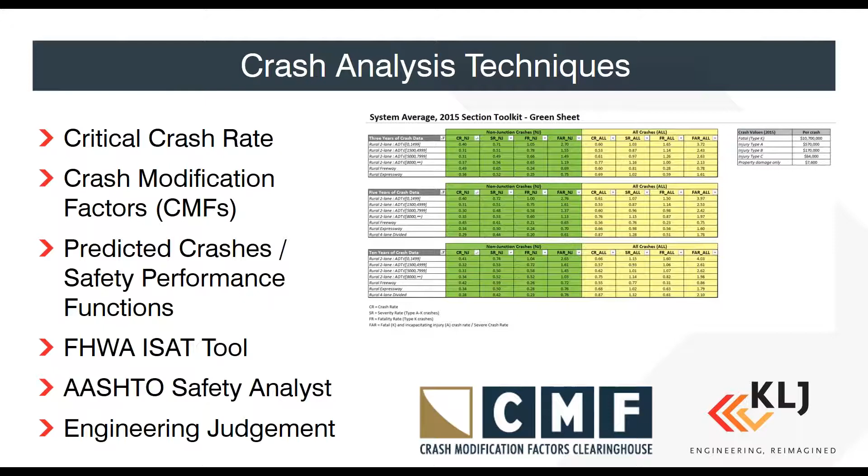But when we really look at the basis of all of these future crash analysis techniques, CMF data is really at the basis of all of those. And what happens with the CMF data is, because it's based on a number of different studies, some of these improvements have quite a big range of what that expected safety benefit is. So two examples I pulled out.

One was a DDI interchange, converting an at-grade or diamond interchange to a DDI. I pulled all of the crash types and crash severities that lined up where they were all the same, and even filtering out some of those crash rates, we still have a range of about 0.54 to 0.81 CMF factor. That's over a 30% difference in those expected safety benefits for that type of interchange.

J-turns or reduced conflict intersections show an even greater range of safety benefit when you start looking at the applications, between 60% all the way down to only a 13% improvement, which makes a big difference when you have some of those higher injury type crashes, and really can skew your final preferred alternatives one way or another based on which CMF factor you're choosing.

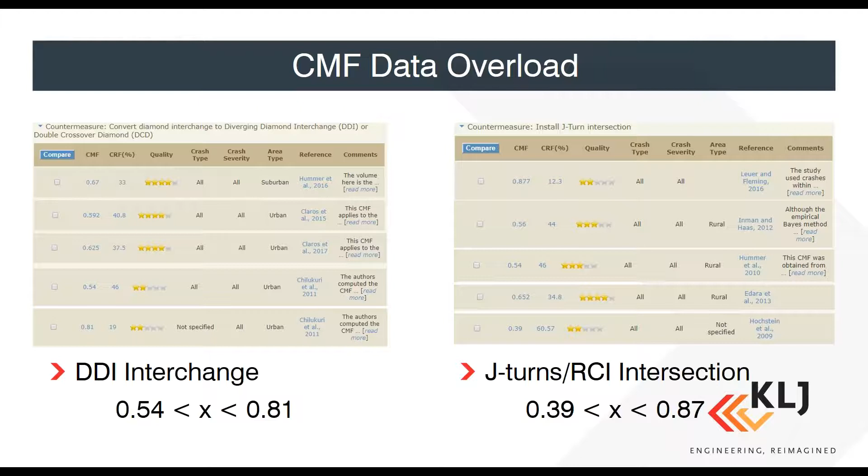So this was what really prompted me to look for other tools that are out there. One of those tools was the IHSDM, the Interactive Highway Safety Design Manual, or model, which has more of a design focus.

It has different inputs such as the horizontal alignment, vertical alignment, lane offsets, shoulder sections, design speed, and driveway density. When you start really looking into these details, there's a lot of spots where if you don't have that level of detail, you're really still guessing, and there's a lot of variability in those values and what your final answer might be coming out of a safety analysis like this.

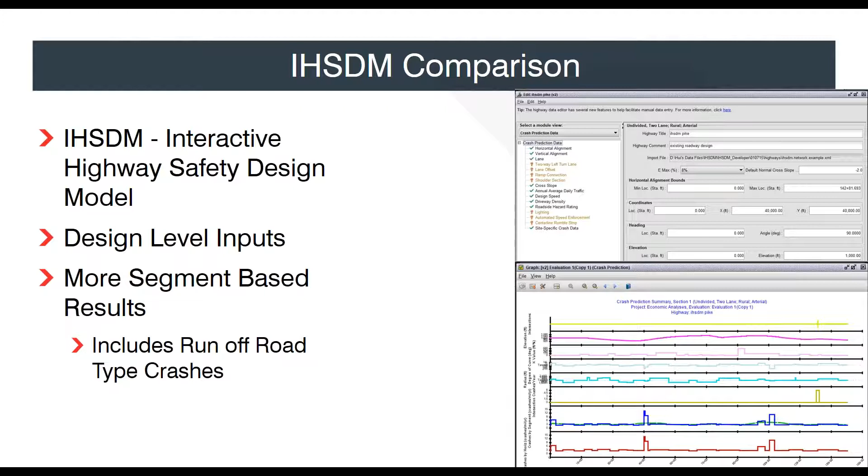So this is really more of a segment-based software that's looking at those final design type safety benefits. It does a very good job of including runoff road type crashes and really looks at all the different crash types you could look at. But there still are some holes when we're really looking at that preliminary stage, looking at 3 or 4 alternatives and trying to pick which one's best for us as traffic engineers.

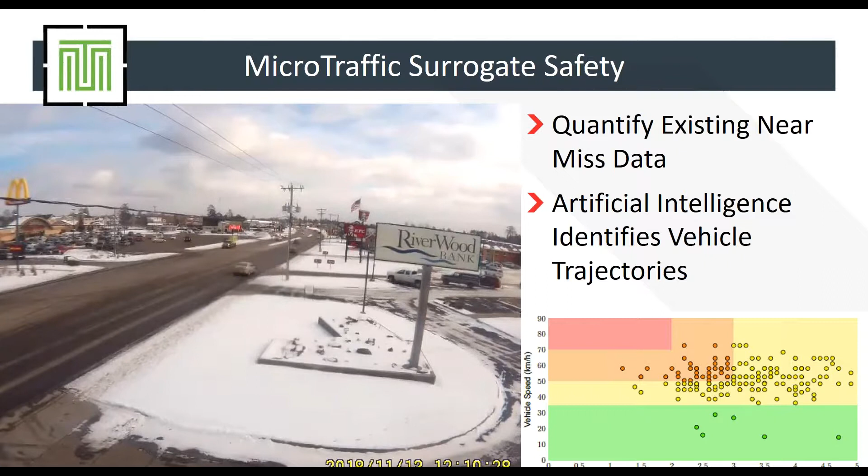So getting into the SSAM modeling approach, this is an example from Bemidji, Minnesota, where we used a company called MicroTraffic to really start looking at the existing safety and existing conflicts on one of our study corridors. What we did with this data is try to quantify the existing near miss data that's happening on these roadways. As you'll see in these 3 or 4 examples, these vehicles are only having about a 1 to 2 second gap where they're getting across traffic before another vehicle intersects that trajectory.

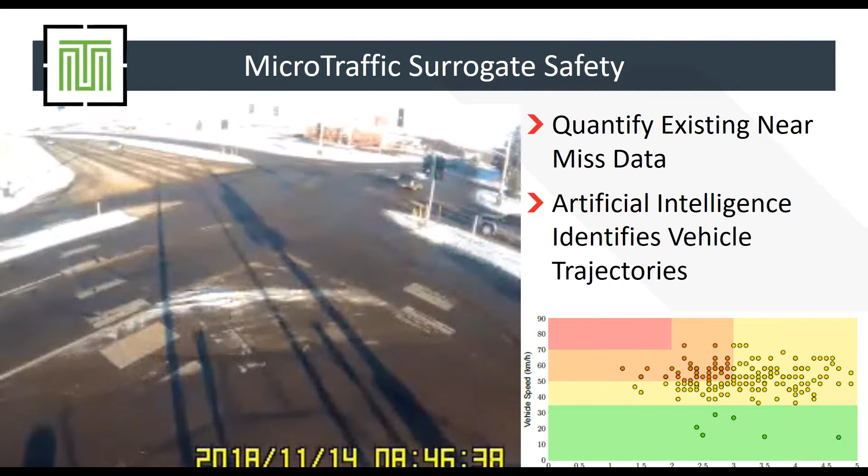By quantifying these near miss type conflicts, we can start looking at what truly is the existing conflict potential of that intersection. In this example, that kind of permissive movement and crossing movement is the most dangerous, when a vehicle makes a mistake, a second or two earlier or later could cause a pretty serious crash. So these are the exact type of conflicts that we're trying to minimize through our design of improvements, to try and improve the safety of both the intersection and the corridor as a whole.

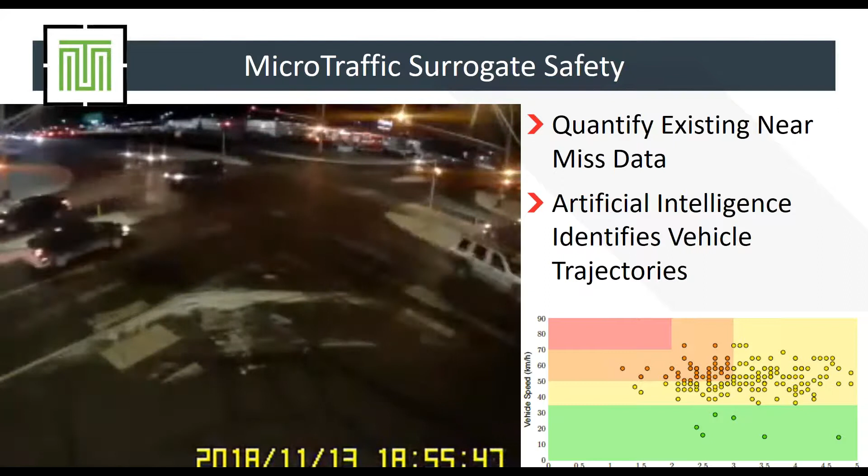Getting into the surrogate safety assessment model basics, the conflicts are broken up into three types: crossing conflicts, lane change conflicts, and rear end conflicts. Crossing conflicts are basically anything between a right angle to a head-on type conflict in the trajectory file. A lane change is when vehicles are shifting lanes at about 30 degrees from that right angle. And a rear end type conflict is when one vehicle is coming up behind another vehicle, and if they didn't make that braking decision in time, they'd end up rear-ending the vehicle in front of them.

SSAM also does a good job of allowing you to calibrate time to collision and post-encroachment time. Time to collision is that front gap ahead of a possible collision, and we are looking at everything from 0 seconds to 1.5 seconds out of VISSIM. That maximum post-encroachment time is more for rear-end type conflicts, where we've actually taken that down from the default of 5 seconds all the way down to about 1 or 2 seconds to better validate from our existing data in our models.

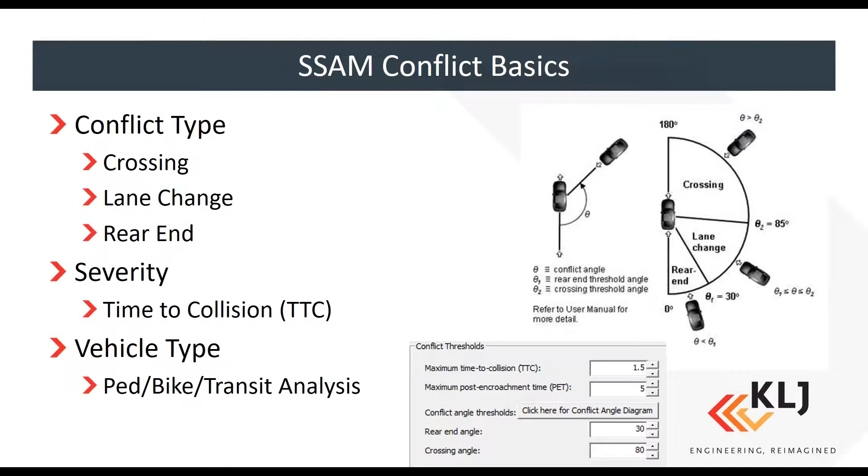The SSAM analysis really starts out with how you're coding your Vissim models. Vissim is by far the best tool to use with SSAM because it's literally checking one box in your evaluation configuration to output this trajectory file of the vehicles. It's very important to have your sensitivity at 0.1 seconds so we're getting 10 time steps per second to really look at the interaction between vehicles. It's also important to keep those constant parameters when you're modeling.

Having a guide to go by for priority rules and conflict areas where vehicles are interacting is very important in keeping your models consistent as you compare alternative to alternative and increased volumes in future models. Also doing realistic Vissim calibration, watching your models to make sure you don't have vehicles crossing other vehicles, is very important, as is making sure signal timing is correct.

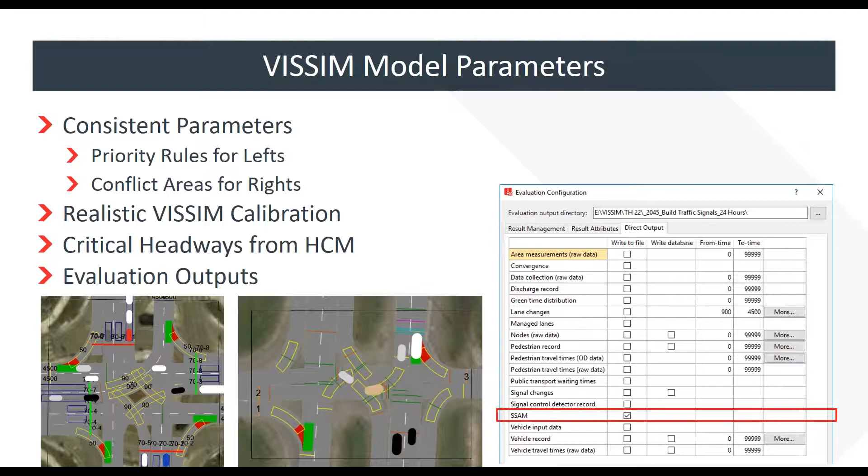All of these lead into issues, if there's a mistake in your Vissim model, you'll have a situation where one spot really pops out as having a safety issue in the SSAM analysis. Also, basing your priority rules on critical headways from HCM is important to really give that variability, with some vehicles having aggressive behavior at unsignalized intersections or permissive movements, and others having a more conservative nature when interacting with other vehicles.

Specifically, a couple of intersections I've pulled out: mini roundabouts and roundabouts. Those are very important to look at for larger vehicles, like WB-62s going through, where you might need an additional priority rule to allow that vehicle to clear out of the intersection before the priority rule allows another vehicle to enter.

If you think of the real life application of a mini roundabout, if there's a large truck in the roundabout, you're probably not going to try to pull into its trailer. You're going to allow it to get through the roundabout, and that's where the priority rule comes in.

So really taking a look at the modeling, looking at those crossing gaps and trying to get them as realistic as possible, is very important.

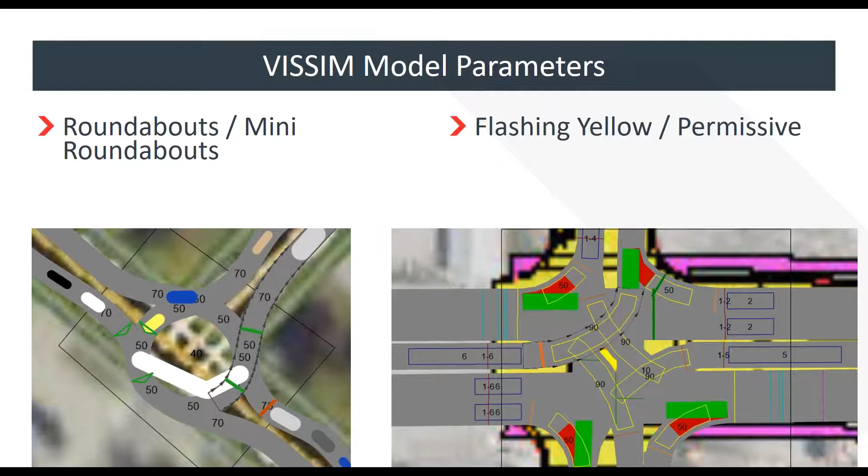Same thing with flashing yellow and permissive movements. We code these with the signal group in the priority rule, so that when that signal group turns yellow, for example in the phase 2 direction, the left turn will actually make that movement on yellow. And if one of the eastbound or westbound through vehicles goes through that yellow light, we'll actually get that crossing conflict. That's what gets quantified at some of our signalized intersections, the conflict we're trying to prevent in these modeling exercises.

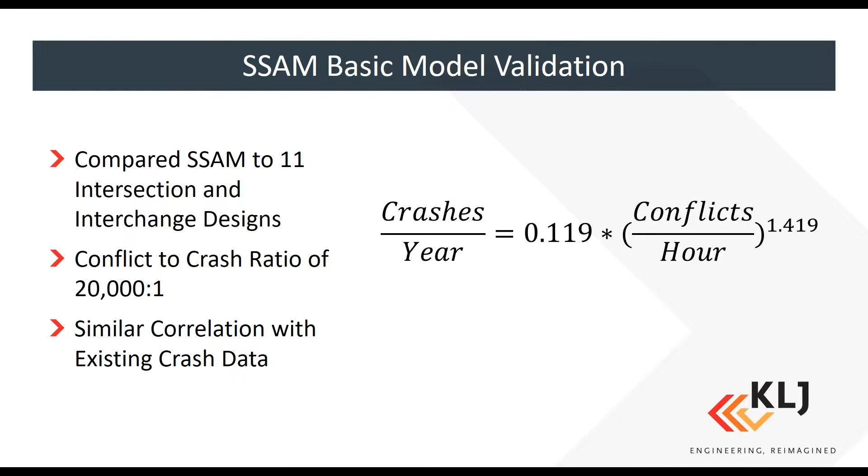The basic model validation for SSAM was done by FHWA. They had quite a few different intersection and interchange designs that they looked at, and they came out with a general conflict to crash ratio of about 20,000 to 1, so 20,000 conflicts in the model end up being about one crash in real life. They had similar correlation between what they were looking at in modeling exercises and what was actually happening in 5-year or 10-year existing crash analysis.

But before we really started using this on a lot of our projects, we wanted to create that validation too. Some of these are projects we worked on in Minnesota, one up in Brainerd, one in Bemidji.

We started looking at the total vehicle conflicts out of Vissim and how they compared to the crashes per year that were actually happening. When you look at the 11.9 and 8.2, and then the 63 versus 45, our modeled conflicts were actually a little bit higher than the crashes that were actually happening out on the corridor.

That's more attributed to rear end and lane change conflicts. We were able to fix a little bit of that by adjusting the post-encroachment time to bring down those rear end type conflicts and better match the existing crash rate for our existing models.

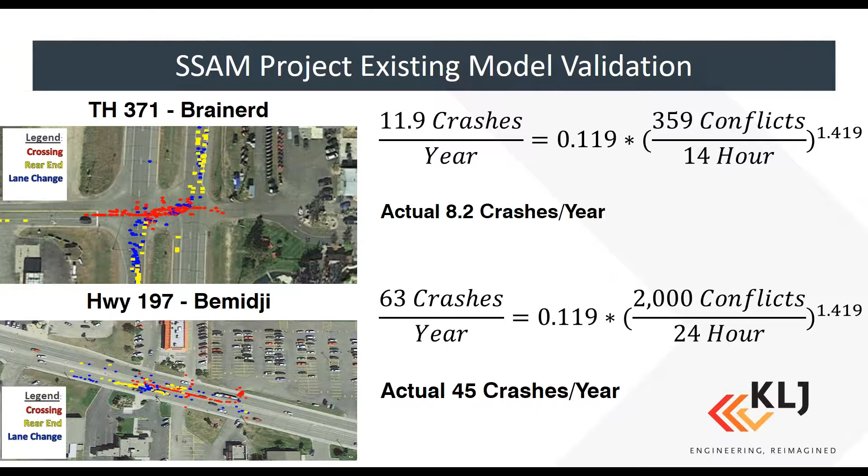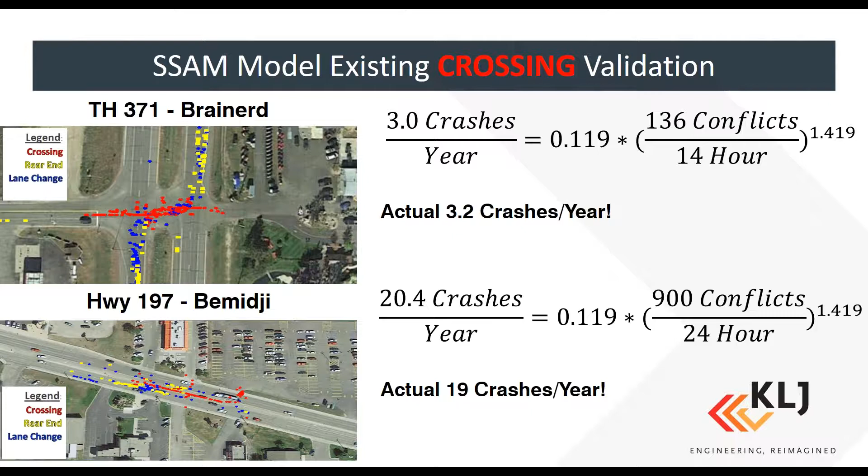But what we also noticed was that when we looked only at the crossing conflicts happening on these projects, we found it was a much better comparison between what was being modeled and what was actually happening in real life. Throughout this presentation, you'll hear me talk more in detail about these crossing conflicts, because these are the right angle or head-on type crashes that are usually most severe, and we really want to avoid these and focus on reducing them more heavily than the other conflict types.

Getting into some of the project examples that KLJ has worked on.

One of the projects up in Bemidji, Minnesota on Highway 197, we had a very high crash rate on this corridor. There were 45 crashes, and a lot of these were serious injury type crashes, costing the community $1.6 million per year. As you can see on the bottom, there are 8 signalized intersections, a couple of major minor approaches that had significant volumes. Those unsignalized locations had kind of that 20 to 40 seconds of delay for those left turns, and this was projected to increase to almost a minute per vehicle of waiting to make that left turn movement out of these accesses.

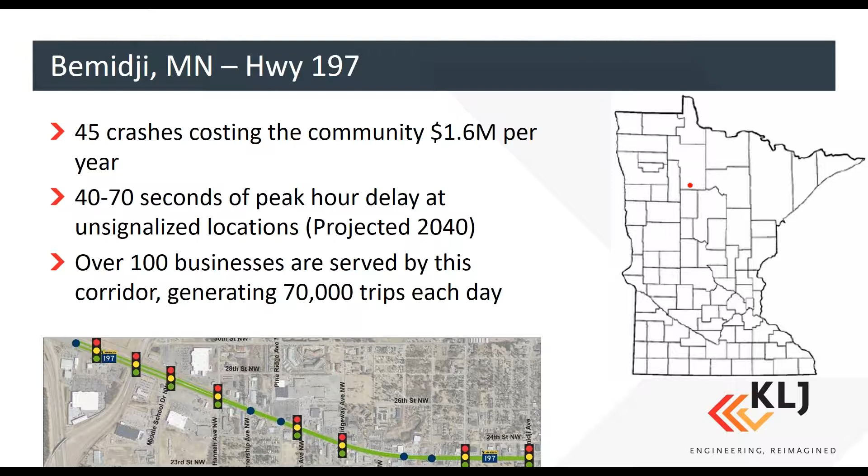Another big part of this project, we had over 100 businesses served on this corridor, and access was very important to all of these businesses. There were almost 60 accesses in about a mile spacing on this corridor. So it really was an access management type project that we were dealing with, and we really needed a way to show the safety benefit of reducing and consolidating some of these accesses.

So when we looked at the existing conflict analysis for this project, rear end conflicts were a very high percentage of the total conflicts on the corridor. These were happening out in the west end of the corridor, where there were high vehicle traffic, high speeds, and signalized intersections. So when you mix all three of those together, you do end up with a lot of rear end type conflicts.

And those did match what we were seeing in the existing crash data too. However, we also saw quite a few crossing conflicts and lane change conflicts being a part of this project, specifically on the east part of the corridor, where there were a lot of protected permissive type signals that you can see at Irvine Avenue, where we had a lot of crossing conflicts. And then in the major retail sections where there were a lot of business accesses, we saw a lot of lane change and crossing type conflicts, not at those major intersections.

So as traffic volumes grew, we saw the conflicts grow quite substantially more than just the linear traffic growth. So for 2040, we had about a 25% traffic growth rate. And then we also had an alternative that showed the peak recreational volumes too along this corridor, which was about a 40% growth rate over that weekday existing period.

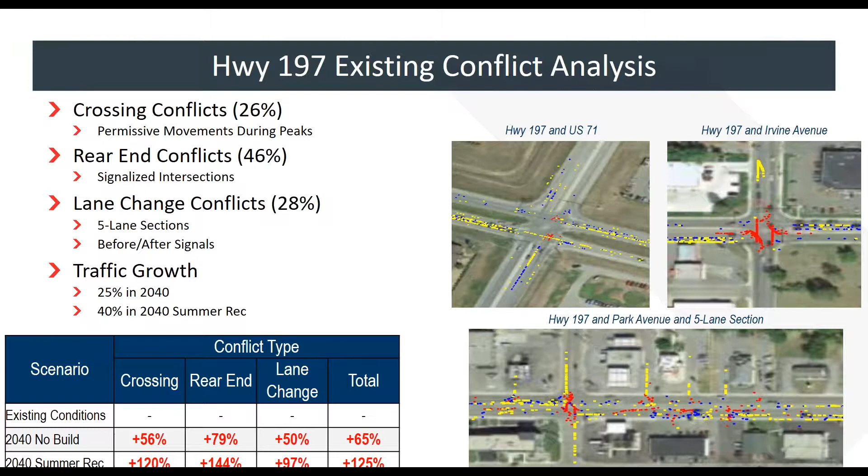So when we started looking at alternatives for this, we looked at some medians. We looked at redoing the signals to more protected movements. For one alternative, we looked at roundabouts with a wide median for another alternative. And then 2 alternatives that got thrown out early were decreasing to a 3-lane section and some access consolidation only along the corridor, which both were thrown out early because they were both increasing the crash rate or conflict rate, and they were increasing delay along the corridor.

So Alt 1 and Alt 2 really saw some benefits. Alt 1 with the signalized alternatives, we looked at implementing a bunch of right plus U-turn type movements for the accesses, allowing that 3/4 intersection so that there was a lot more access into a business, and then you had to make that right plus U-turn out of the business. And we actually saw a total reduction in total conflict, but we also saw all 3 categories decrease in that crash rate versus the no-build alternative.

However, in the roundabout alternative on the right side, we actually did witness an increase in total crashes or total conflicts in the model. Rear end and lane change type conflicts increased quite a bit coming into the roundabouts, trying to get in the right lane for roundabouts, getting to and from accesses in the right lane. So it did promote more of that lane shifting in the total corridor alternative. However, one of the big advantages of alternative 2, the roundabout, were the crossing conflicts were decreased by about 85 to 90%. And when we look at these crossing conflicts, these are the severe injury type crashes.

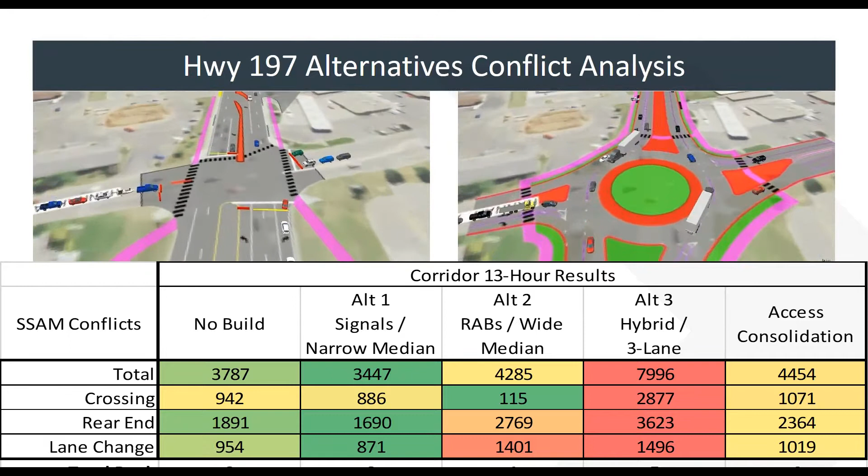I'll go back to that a lot through this presentation, where we're really looking at the safety of the corridor. In the total safety ranking at the bottom, we gave that crossing reduction about 2 times the weight of the other rear-end and lane-change type conflicts, because of that improvement in the severity rate. That ended up showing alternative 2 was one of the best safety improvements for this corridor.

Another project we worked on was up in Brainerd, Minnesota on 371. Again, it was an access management study, trying to show the benefit of taking away access from business - what is that safety benefit to vehicles going through the corridor and getting to and from that business still. This project had a lot of event and recreational traffic, with Brainerd International Raceway along the corridor, bringing about 100,000 people to events during the summer, so there's a lot of traffic coming in and out of this approach.

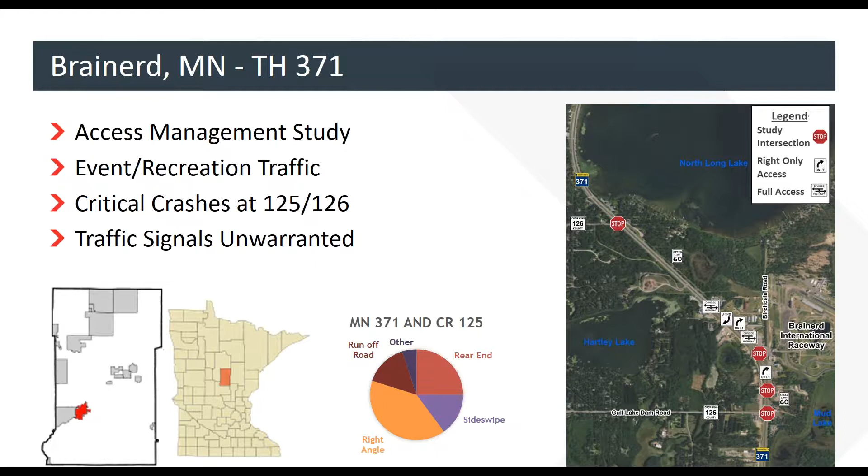There were critical crash rates at both county roads on the bookends of the corridor, but traffic signals weren't warranted along this corridor. MnDOT's previous recommendation had said just put a traffic signal at both of these intersections, but there was really a re-looking at this because it wasn't going to meet those traffic signal warrants.

When we started looking at the SSAM outputs for each alternative, we noticed crossing conflicts were quite high with these unsignalized side street stop approach, full access intersections. Because there were about 7 or 8 of these along the corridor, drivers along 371 had a hard time knowing where traffic was coming out of, and it wasn't spreading the conflicts out throughout the corridor, as you can see in that vision on the left side.

As we started looking at different alternatives, we really saw that consolidating access plus implementing these RCI-type intersections - the right plus U-turn - cut down these crossing conflicts by 90 to 95%.

The total safety benefit, looking back against those CMF factors I brought up earlier, between 13 and 61%, shows we're actually decreasing total conflicts by about 49%. So that's right in that range, giving us a lot better idea of what this actual safety benefit would be along this corridor.

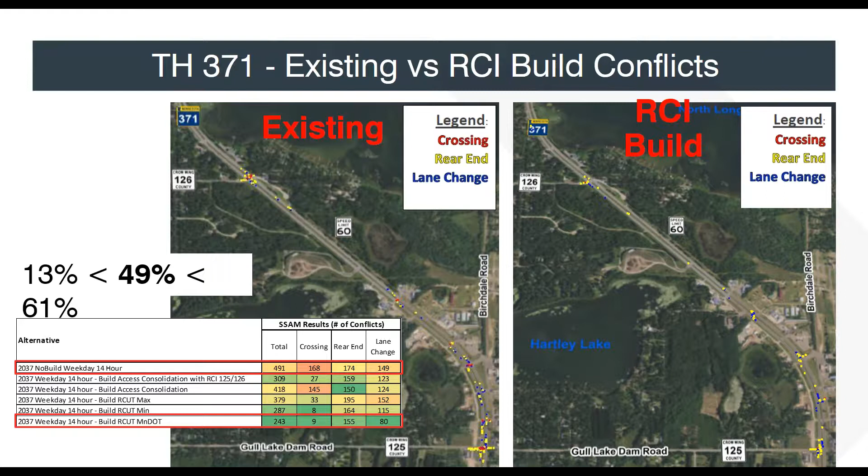Again, looking at those crossing conflicts, there's a huge benefit in taking away all those crossing conflicts except for the left-in at those 2 major intersections. Looking at our proposed alternative, you'll see that traffic isn't making those full access type movements - you're not getting that 2-stage type crossing, and overall it's a lot better of a corridor for limiting those conflicts.

For the future alternative, we proposed 5 RCIs from those 8 existing intersections, allowing vehicles to make the right plus U-turn movement, which really only creates crossing conflicts for the U-turn movement and the left turn-in movement. On the right side, you can see that with the volumes in the model, these crossing conflicts were almost non-existent for this specific alternative.

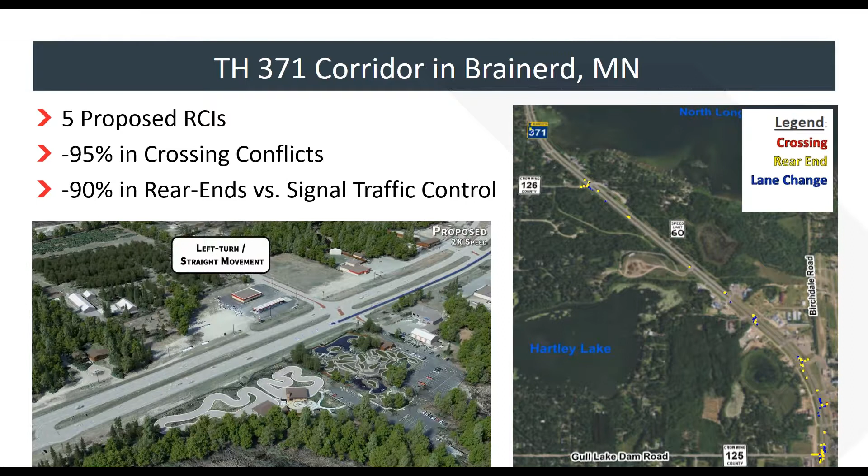Our third example had a lot higher volume than the previous examples. This was in Mankato, Minnesota, south central Minnesota. 6 critical crash intersections were identified along this corridor, 2 of those being existing multi-lane roundabouts at Adams Street and Madison Avenue.

What MnDOT was really looking for was whether to continue implementing these multi-lane roundabouts, or turn this back into a signalized corridor. One impact of this study is that instead of just looking at peak hour analysis, we wanted to look at 24-hour safety and operational benefits we could see in the roundabout model versus the signalized model.

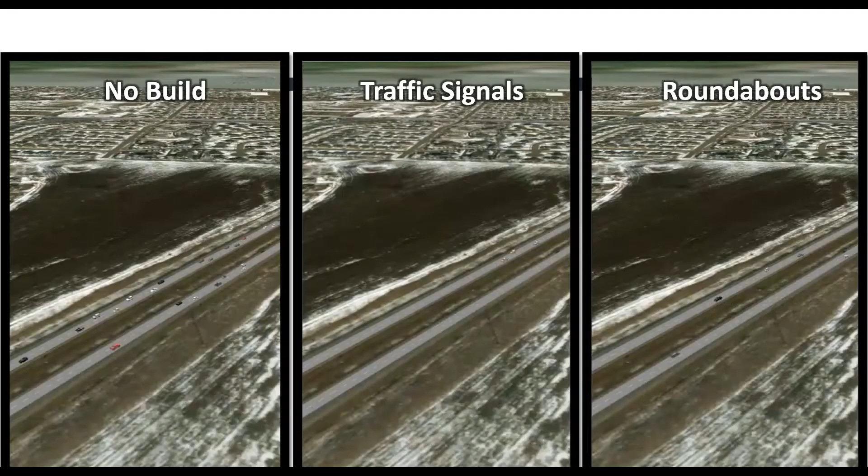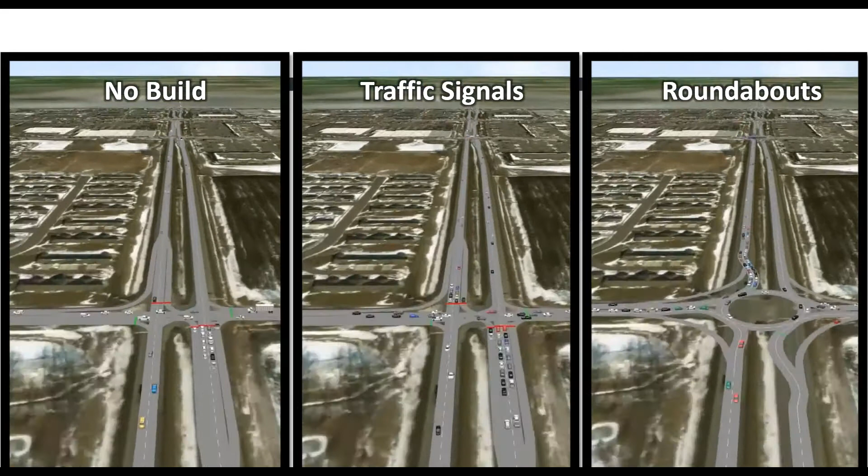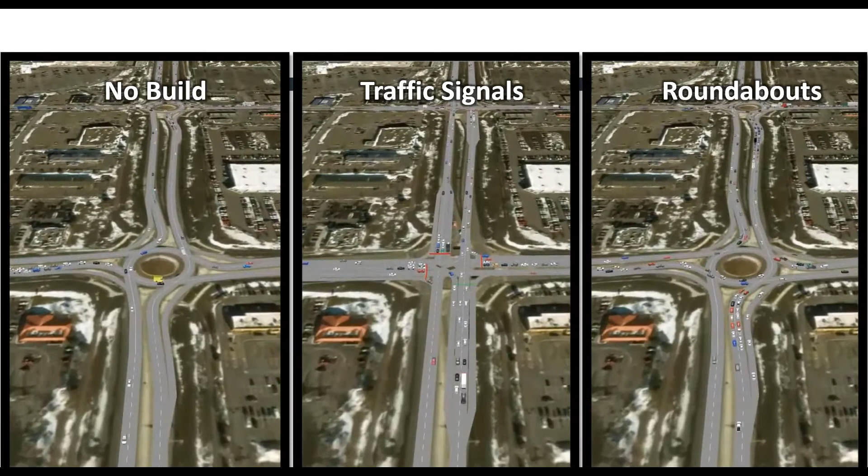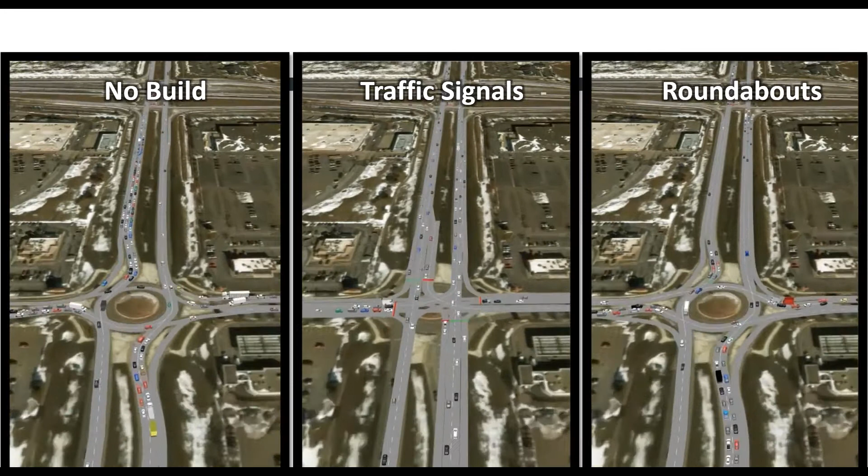When we modeled this in Vissim, we started to see that during the PM peak hour, the roundabout modeling did have worse operations than the traffic signals, with some queuing - about a 10 to 15% operational deficiency versus the traffic signal model. As we went to stakeholders with this information, they started questioning whether the no-build with the two roundabouts at Adams and Madison was still the preferred vision for the corridor, or whether they really wanted to change this into a full roundabout corridor with a mix of both 2x2 and 2x1 roundabouts.

And so as we looked at these operational results, you can see from this daily representation of delay that yes, in that PM peak, the roundabouts did operate worse than the signals, but the other 23 of 24 hours of the day, we were able to limit that operational delay at those roundabout intersections.

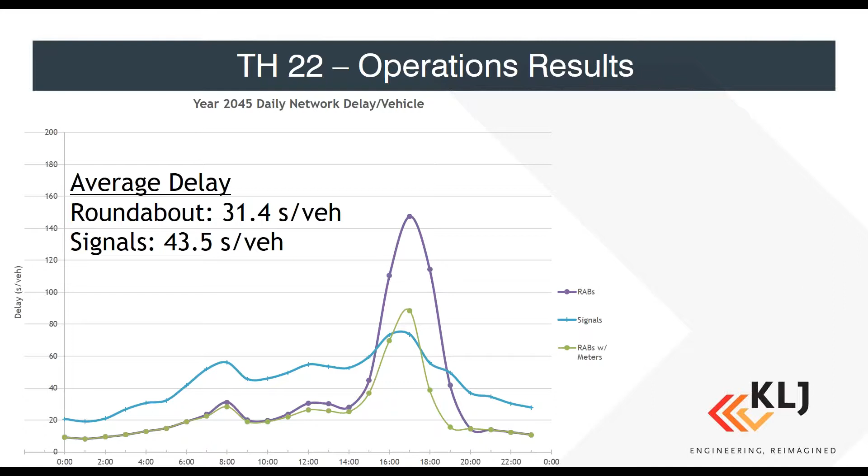Looking at that average delay per vehicle totaled up, the roundabouts actually minimized about 25% of that delay compared to the signalized model. So looking at this, the stakeholders really felt confident that by 2045, if they were seeing the aggressive traffic forecasting that they were making, they could still implement meters at a few of these roundabouts to keep that delay under control.

But when we looked at safety, the roundabout corridor really was maximizing the safety benefit versus the traffic signal corridor. So for 2030, which was the forecast they felt more comfortable with, we were seeing a 10% decrease in total conflicts, with about a 15% decrease in crossing conflicts, even having some 2x2 and 2x1 type roundabouts along the corridor.

By 2045, although the total conflicts did rise, especially with the meters, we were still minimizing those crossing conflicts, actually at more of a benefit with the roundabouts than with the 2030 volumes. So we were really able to show that yes, you might have a higher crash rate with some of these roundabouts, which is what they were looking at with existing crash rates, but they are a lot less severe, and the total conflicts are really only going to be about 10 to 40% more than they are today.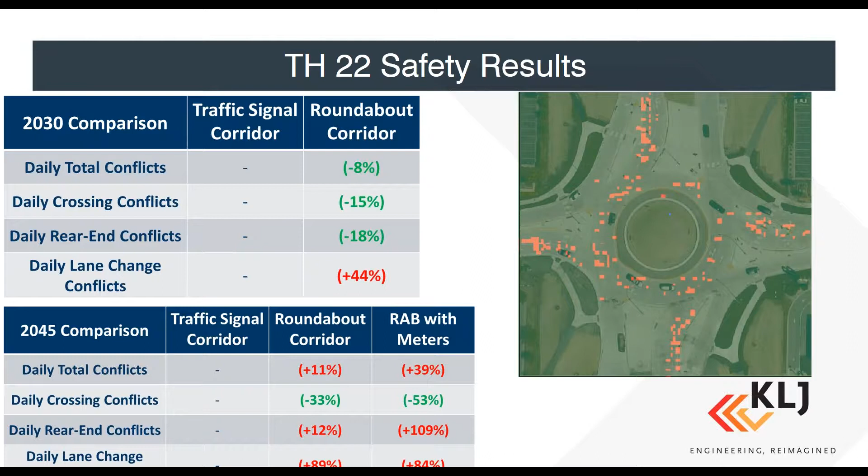Our last example here is in Grand Forks, North Dakota. This was on the UND college campus. So we were really looking at ped, bike, and transit considerations along this corridor, looking at multimodal conflicts along this 2-lane, 3-lane section. But they really wanted to expand the cross section to prioritize transit, bikes, and peds, where the original corridor wasn't doing that.

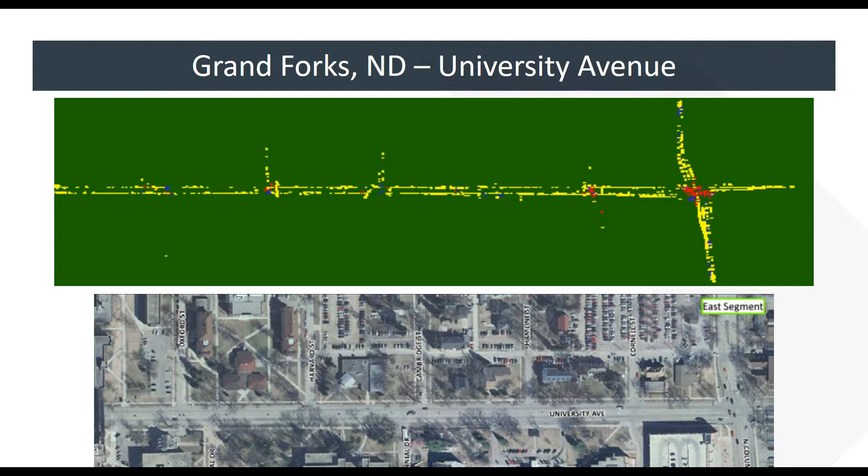But where SSAM was very useful was really identifying where those ped conflicts were happening. Because this was an unsignalized corridor, there were multiple ped crossings along the roadway where peds could cross and have to stop vehicles. And during major class time arrivals and departures, vehicle traffic was really just going crossing by crossing, having to stop for these peds crossing the road, and it created kind of a situation where during peak times, vehicles knew to look out for peds, but during those off-peak times when there were a lot less peds, it was a lot harder for vehicles to see those peds and stop.

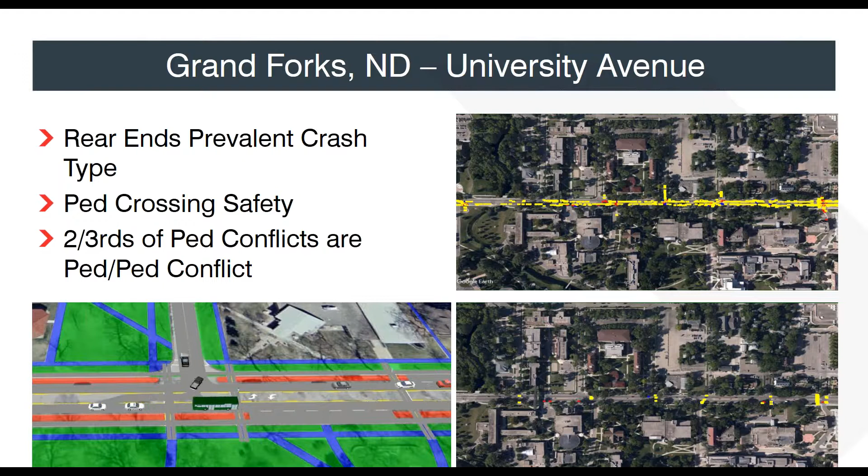And so as we started modeling, we did notice that there were a few crossing locations that did start to show crossing conflicts that you can see in that bottom right. We were able to just take those pedestrian interactions out of the SSAM data and really look at where these conflicts were happening. We were also able to filter out that graphic even further because we noticed in the SSAM data that peds running into peds also quantified as a rear end type conflict. So we were able to filter that data even further to really only look at those vehicle and pedestrian type conflicts.

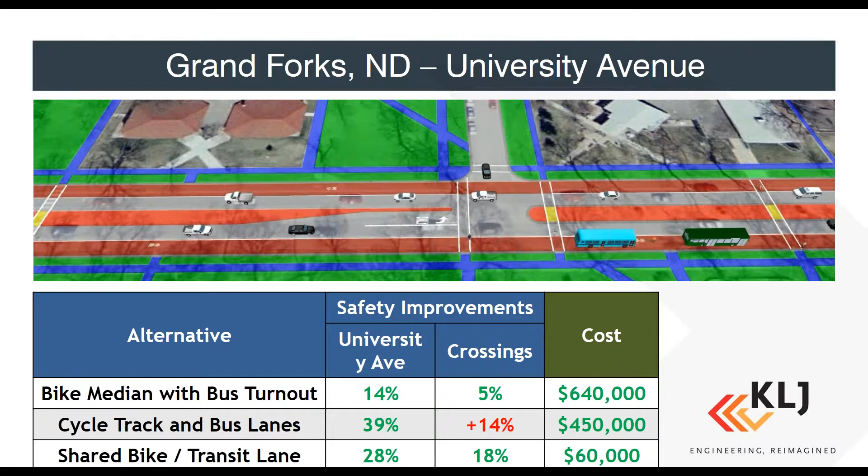And lastly, when we started looking at those improvements that we were looking at with a cycle track or a bike median and a bus turnout, and then our final preferred option of a shared bike and transit lane, we were really able to prioritize both the University Avenue safety improvements for vehicles, as well as those pedestrian crossing locations, and also take into account the cost of the project too, to really pick that solution that had the best combination of all of those.

As with every one of my presentations, I also like to pick apart ways to improve the method, really using those daily VISSIM results to understand what's happening during the day. We've noticed a lot of benefit in that versus just running those peak hour type analysis, especially in that Mankato example.

We're able to show a lot of benefit outside of that peak hour and really take that into consideration both for operations and for our safety data. Being able to filter the link and lane numbers to determine the mode would be a helpful way in SSAM to really prioritize the software.